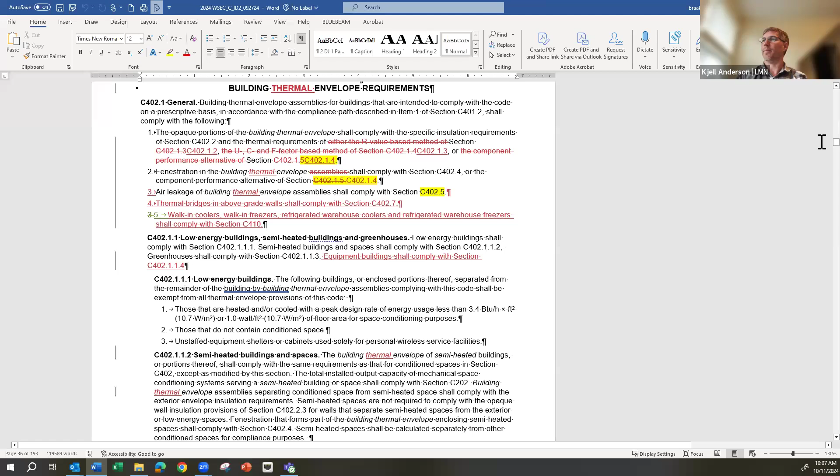We now have an agenda. We are on to item 3, continued review of the integrated draft 2024 Washington State Energy Code commercial. As mentioned in the intro, if we could skip to the TSPR C409 section, that would be great. Mike Rosenberg, are you on the call? Or Supriya? Supriya's here. Mike's on travel and won't be able to join. He asked me to join for this discussion.

So I'll start by giving folks an overview of C409, specifically how it differs from the current HVAC system performance approach in Washington State 2021, and also lay out reasons why Washington should probably continue with the 2021 approach for their next code edition.

So to begin, C409 is based on the 90.1 2022 approach for HVAC system performance. Hey Supriya, just to be clear for the whole tag, you are recommending, based on your review, that C409 be maintained in its entirety without the redlined changes, as opposed to going with the redline changes.

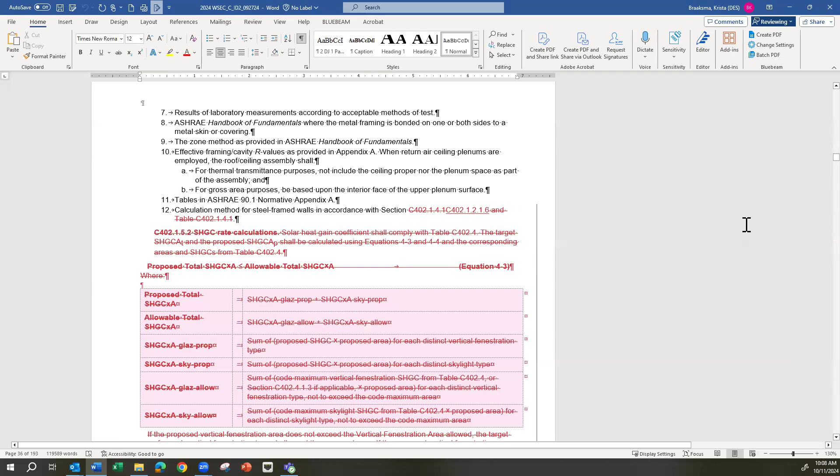Is that correct? So if I understand correctly, the redline changes for the new code edition bring it more in line with IECC 2024, right? That's correct, the redline is IECC 2024. So I am recommending not making the redline changes. There are some things which have been improved, and we can go through and talk about those, but yes, I am recommending not implementing the 2024 approach for the next Washington State Energy Code.

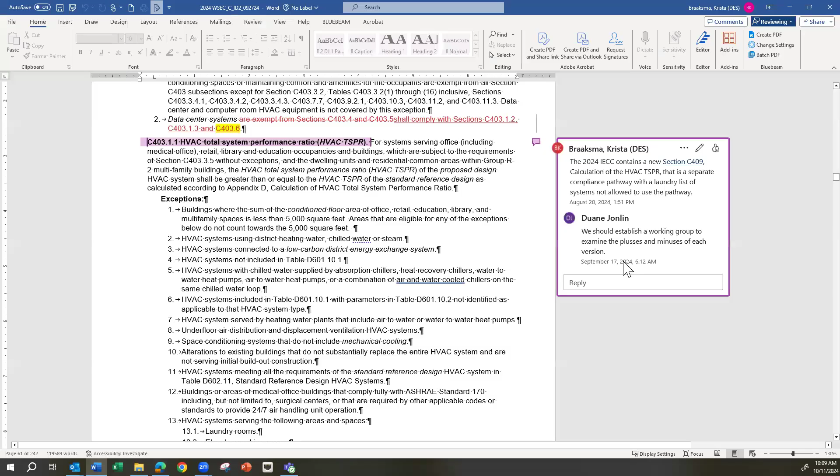Okay, do you want to go through the top few reasons why you're making that recommendation? I want to clarify before we get into this that our C409 is metering, not total building performance. Right now, I don't have in our integrated draft the IECC C409 in there. So Supriya, what you were suggesting was that we don't adopt the IECC 2024 C409, and it's not even in the integrated draft. One of the big reasons was it's not compatible with Washington codes, is what I heard. Correct, it's not compatible.

So the big thing is, the Washington Energy Code uses an approach where the proposed building is compared to a baseline, and the baseline is modeled with dedicated outdoor air systems and heat pumps. The system configuration was determined by the Washington State Energy Code tag with the objective of decoupling ventilation air from conditioned air and having heat pumps for space heating and cooling. The DOAS in some cases also have an ERV.

Now the 90.1 or IECC 2024 approach is extremely different. In Washington State Energy Code, the proposed building is directly compared to the baseline, and the proposed needs to be equal to the baseline or better to comply. So basically you're comparing the performance of the proposed system to a DOAS and heat pump configuration. But in the 90.1 and IECC approach, there's a baseline which is defined based on 90.1 2004 code requirements, so it's a stable baseline similar to Appendix G, and the target system is a good-choice HVAC system selection.

It's not representing heat pumps or decoupled ventilation systems in most cases. So for large office or medium office, it could be a VAV or packaged VAV with reheat, with electric resistance or a hot water boiler. Also, this process establishes an MPF, a mechanical performance factor, similar to the BPF concept in Appendix G. So the proposed building would be compared to a stable baseline with this MPF factor applied on top of it for a target performance threshold.

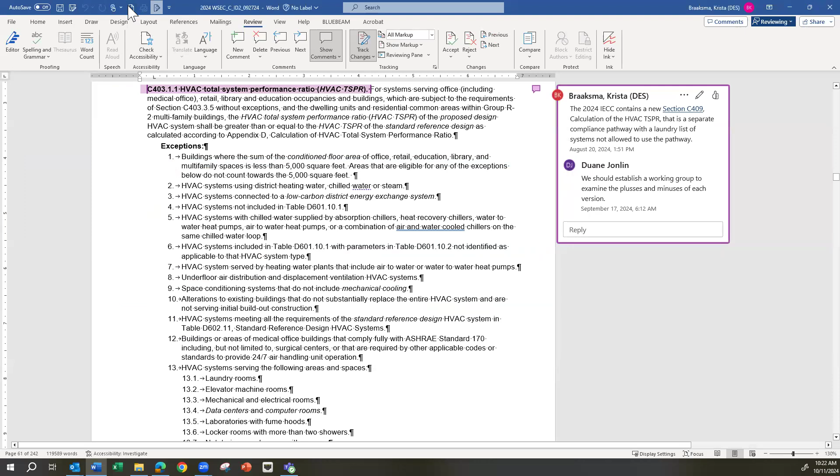So first off, we eliminated any language that would inadvertently cause it to require an engineer. We all unanimously agreed that not everything needs an engineer, and we also reviewed where it was used.

And then secondly, there was a listing of independent in the definition, and in some cases where it was used, independent could force an unreasonable expectation that a contractor had to hire another subcontractor to verify things, or an engineering firm would have to hire a sub-engineering firm to verify things, which was unnecessary in a lot of situations.

So we felt that adding some qualifiers like qualified person, competent, possessing technical expertise and experience, was enough to give the code official discretion to reject any bad sources, but without actually imposing onerous requirements.

Greg, are there comments or thoughts on the proposed revision for this definition?

I would say, just as a code official, that the definition we have now is not great, but the proposed definition is even more nebulous, and it would be hard for any code official to argue that somebody doesn't have enough experience. Basically, I think an approved source becomes just about anybody.

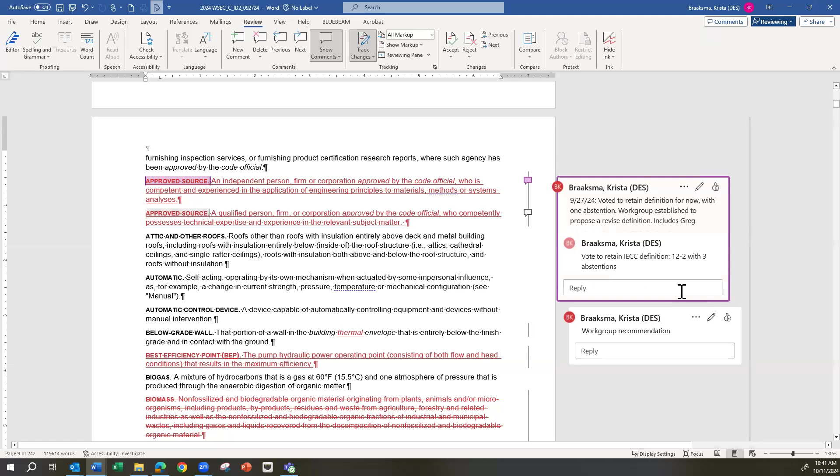Greg or anybody else, do you have a recommendation? No recommendation yet, that's a bigger issue. We've had some emails back and forth, but haven't met yet. We're waiting until after we do the service water heating and space heating sections, since those are directly impacted. Once we've gone through those red lines, we'll meet. Appreciate that, thanks for all your work. Ideally, if you could get your recommended language, or minority reports, to the group a few days ahead of our next meeting, that would be spectacular. I'm envisioning this probably being a code change proposal since it'd be pretty significant either way.

To be clear, the only thing we're considering now is whether there is language in the IECC 2024 that is better than the Washington State Energy Code 2021. So the recommendation could be to leave it as is, and there'll be multiple code change proposals about it, I'm sure. That's what I would expect. But if there are any great improvements we can make now based on the 2024 IECC, that would be fine as well.

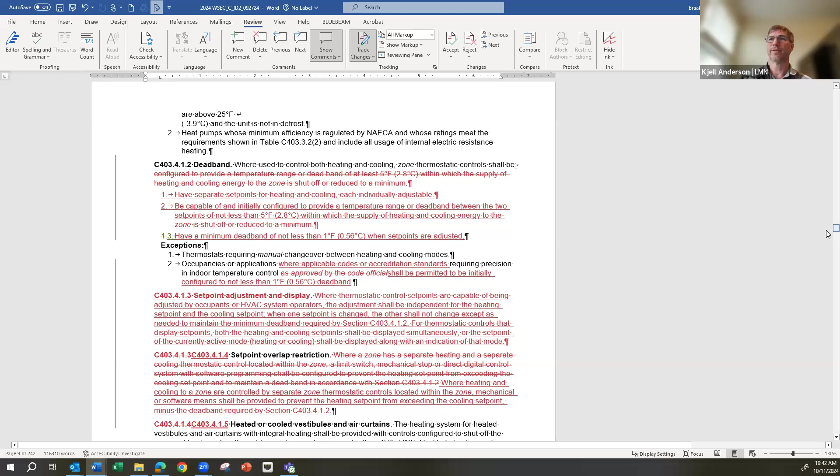Okay, those were our work groups. So let's go back to where we left off last time, which was around... do you remember where we were, Krista? I was in the beginning of C402 somewhere. We kind of skipped around a little bit.

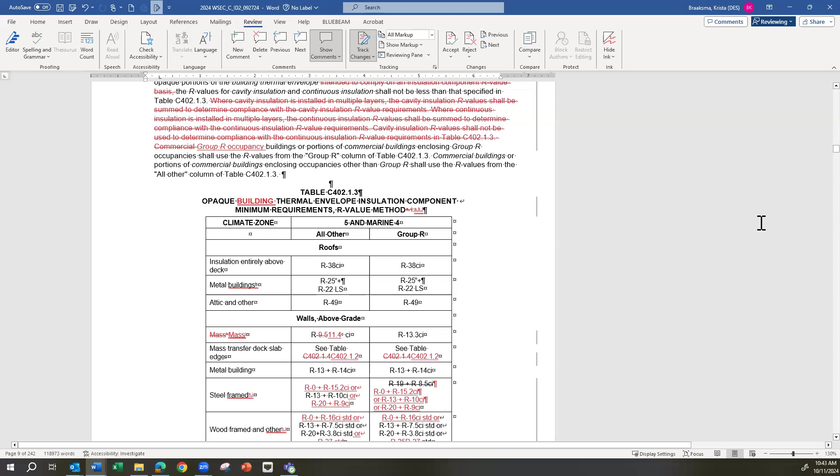So now we're going back to our normal, regularly scheduled program where we scroll through once we find the right place. We'll scroll through and use the redlined updated language unless someone wants to discuss specific provisions, so just raise your hand and we can discuss. Is this about where we were? Yeah, we discussed the U-value table or the R-value table, and there were some minor changes to that based on the discussion, so we might want to take another look as they've been modified. But that's about where we left off, I believe.

Okay, here we are. As Krista slowly scrolls through the code, raise your hand if you have any suggestions or recommendations for the tag to consider. To be clear again, the black is the 2021 Washington State Energy Code commercial, and the red is the 2024 IECC language. Our task is to make the code more stringent if the 2024 IECC is more stringent, or not adopt the language if it is not more stringent. Go ahead, Larry.

Can you give us time to get caught up to where we're at before we're moving through this stuff? I haven't even turned to the right page yet. Thank you, okay, we can pause for 20 seconds to get up to the right page.

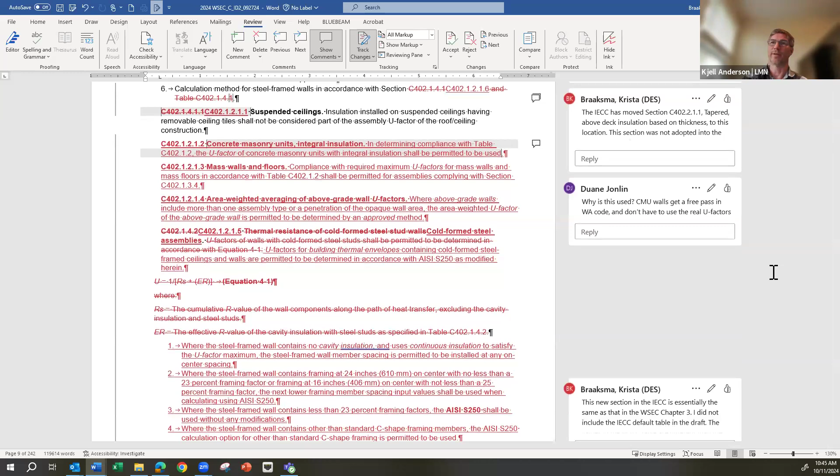Duane, looks like you had a comment on the CMU C402.1.2.1.2. Do you want to say anything for or against what's on the screen? Well, concrete masonry units, integral insulation. It talks about how you determine compliance with the table, but in our state code, those don't have to comply with the table. So there isn't any point, unless somebody can think of some reason that you have to determine the U factor of those CMU walls with integral insulation.

Okay, maybe now I'm thinking of a good reason to argue with myself, because the CMU with integral insulation exception applies to 15 specific building types, right? And so I guess this could be used for some other building type that wants to use that value. So tell you what, can you delete my comment there?

Okay. Uh-oh, skipped ahead. Okay, we'll find ourselves and then start scrolling again through this, Larry.

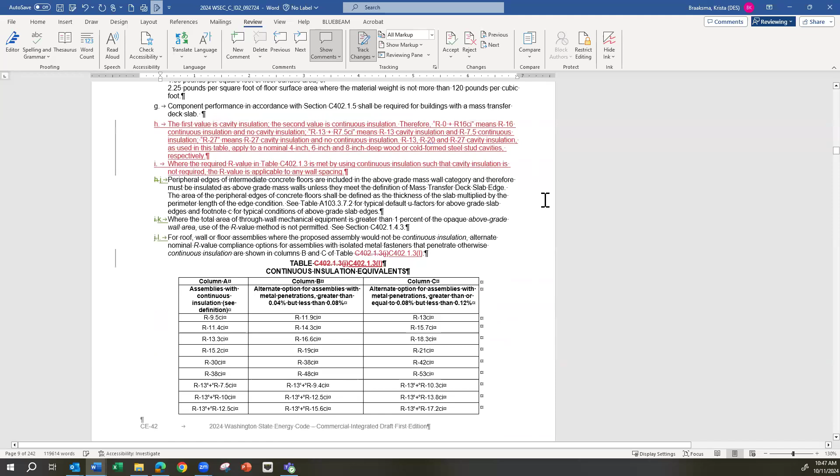Can we put a note in there about those 15 building types that this doesn't apply to? Okay, so there's some clarification there. I mean, Duane brought up a good point about those, and it would be nice to have a little footnote in there that says those 15 building types don't apply to that. Okay, like a C section. Right.

I personally don't support that change, because the first part of the sentence says determining compliance with the table, the U value table, and in that table it says that you don't have to comply. So I don't think another note here is needed.

That makes sense. The section Krista is in right now is the footnote. Yeah, was that table C402.1.3? C402.1.3. 1.2, wasn't it? Yeah, it's also in the 1.2 table. Right, I just happen to be right there. So this is the same one for the 1.2. Yeah, okay, that makes sense to me. It's already adequately referenced.

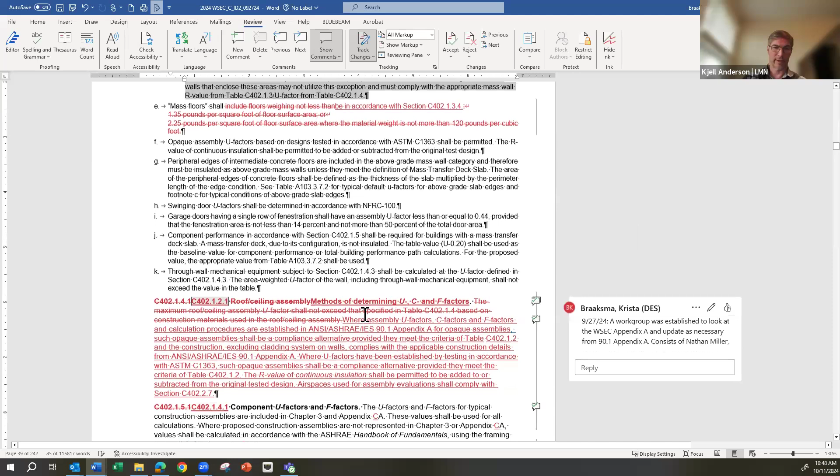Yeah, I think Larry's concern is covered. It will continue scrolling through.

And then here is where I added the additional values from the 2024 IECC table. They're basically alternate compliance factors for convenience.

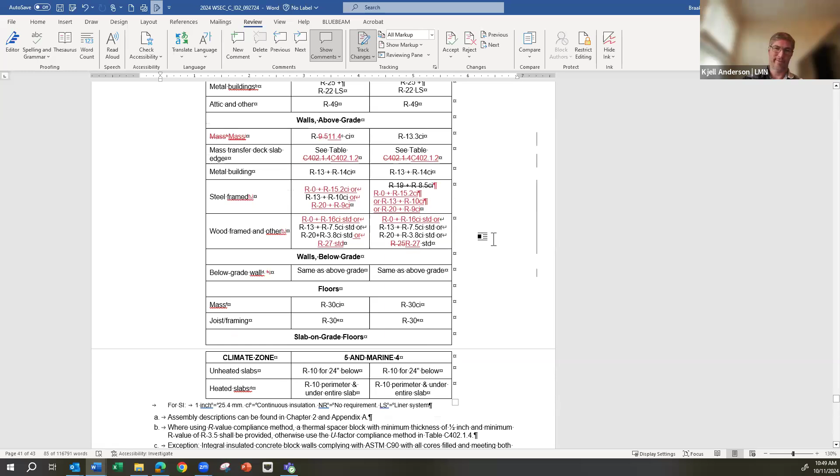Larry. If you back up in the table there, hold it right there, steel frame. So in our table, it showed R19 plus an R8.5, right? So are we talking about eliminating that? I can go with adding it, but I don't think we should eliminate something we already have in there. I mean, it's another option.

You see steel framed where? Yeah, I'm looking at that. You're scratching out something that's been a practice and you're inserting something new, but you're not allowing the practice that's been used. So why can't we add the additional writing and leave the scratch out there? I mean, not scratch it out, leave it there, just add the additional.

Because our rule that we're following here is that we're going with the more stringent of the two. Right? No, if it's the more stringent of the two, that would only leave you one to choose from. Now you have three additional to choose from. So it'd be much more restrictive to leave it the way it is.

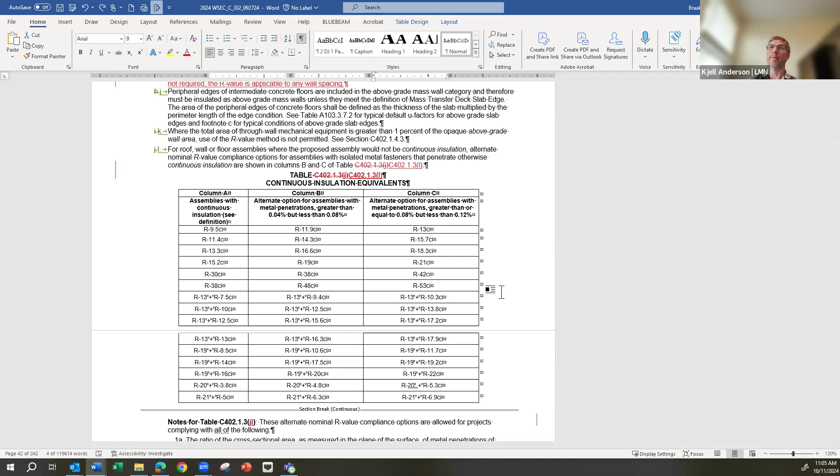Just to be clear with everybody, when someone says we will submit a code change proposal, the tag will not submit code change proposals. The tag is made of members, and members, and anyone in the public, are more than welcome to submit a code change proposal. But the tag will not officially convene to make code change proposals. We will only accept code change proposals and review those.

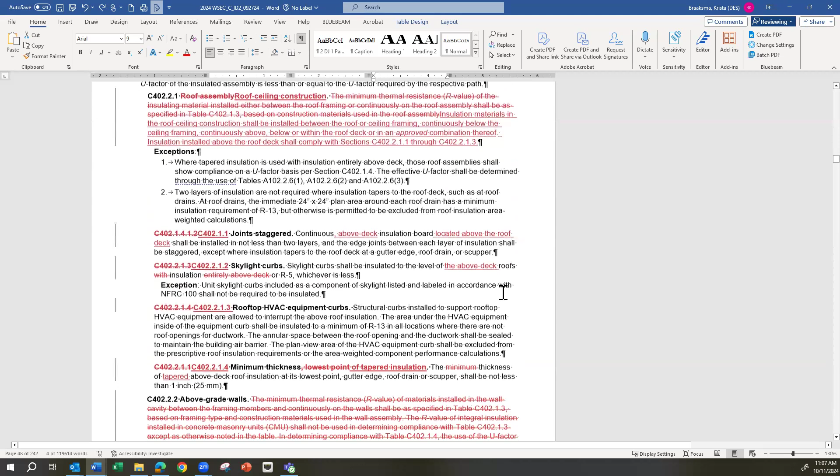I had a little note on C402.2.1.1. The sentence says continuous above-deck insulation board located above the roof deck. Seems redundant to me. It's a minor thing, but things like that bother me. I'd suggest striking it, making the sentence say continuous insulation board located above the roof deck. I'd support that, makes sense. Look, we just shortened the code by two words.

Makes sense, we don't really need a motion to do that. When we make the motion at the very end, it will include all the things we've discussed. Good catch, Kevin.

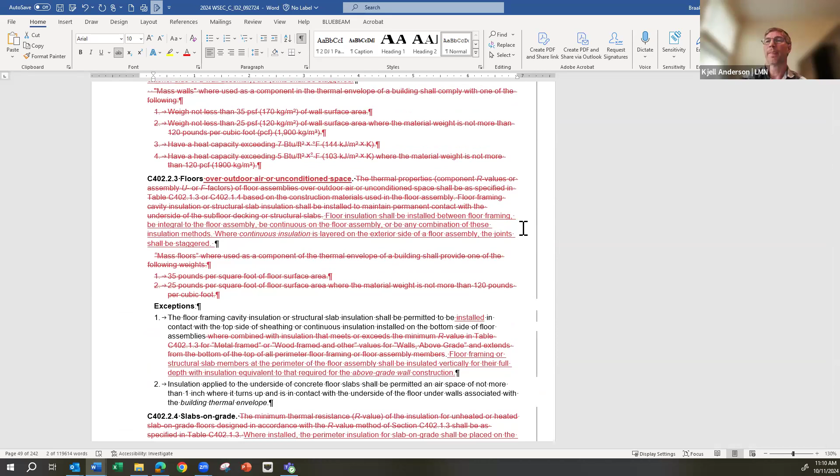Kjell, could we, I'm sorry, I think we passed by something back a page or two, 402.2.3. Sure, we can always go back, I want people to feel free to do that. The text is so tiny on my laptop, I'm having a hard time seeing where you are, but did we...

Did we take out that sentence about the cavity and continuous insulation? Okay no, that looks like that was fixed since I last saw this. Sorry, keep going. Thanks, Duane.

I have another one at the bottom of 402.2.7, I think. There's that last rate, 70 millimeters per second. I don't know, do we ever have just metric units in our code? Could maybe we just have a staff note there that will figure out what the airflow is in inches per second and insert that, or are we okay just leaving it as 70 millimeters per second?

Yeah, if ASTM-C 1363 is in millimeters, then that would make sense. Right, I think the C indicates that it's a Canadian standard, and they just can't help themselves. If it's okay, if it's part of the standard, I guess we can continue on. Well, go ahead, Larry. Canadians told me yesterday they want to change the Canadian minute to 100 seconds too. So maybe that, yeah.

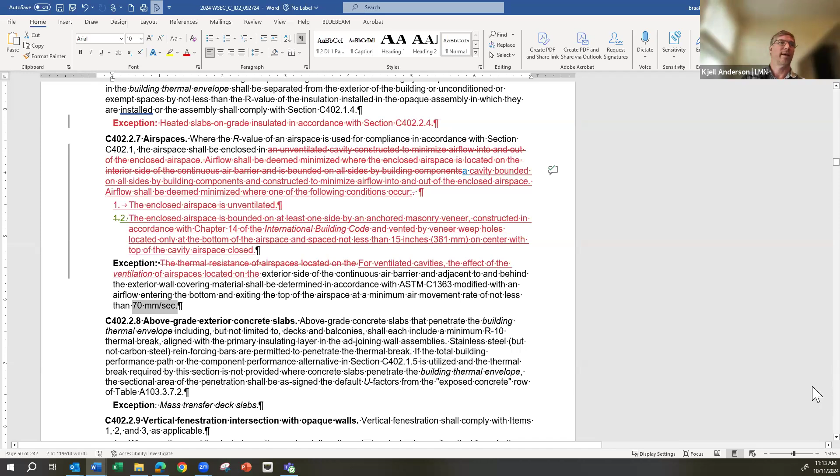Well, I think that it is a good idea to have it in inches per second. Yep, I mean, because the guys out in the field, they ain't using any metric that I know of to speak of. I finally had to bust down and buy a metric tape measure the other day, but we use it once in a blue moon. So, okay, can we have a staff note in here, it appears to be 2.7559 inches would be 70 millimeters. I don't know how many significant digits we want, but 2.8 would be one significant digit. Sounds good.

I have a question about the numbers in this table. Sure. Krista, could you call up the IECC values for solar heat gain coefficient? It'll take me just a second. I think we missed, I think some of the updates got missed. I thought I double checked it after the last meeting and they were the same, but I could have missed something. Yeah.

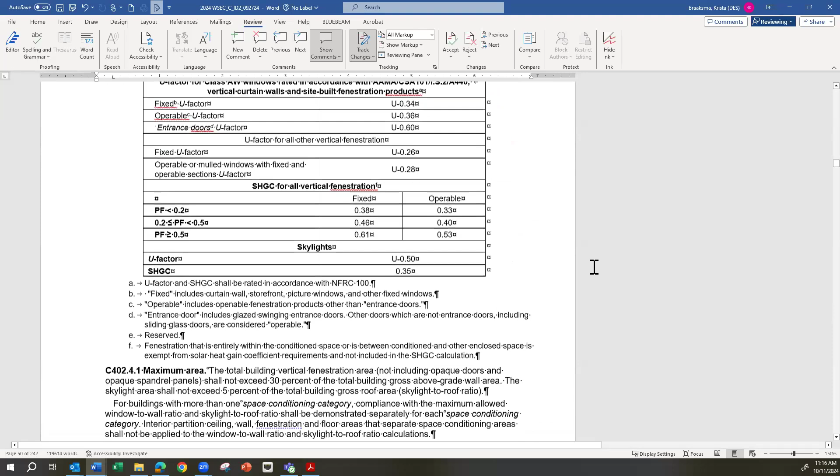Pam? Yeah, apologies, I stepped away for a moment, so I don't know if this was covered, but the section numbering in the 24 code did change, so fenestration is C402.5. Right, but that still doesn't work with the energy, the WSEC, because we skipped a couple of sections that aren't adopted. So we wouldn't reserve C402.4 and update numbering for fenestration to match the IECC?

No, that would require striking all of C402.4 and putting it all in C402.5, and so everything would be, it would be really hard to find where the changes are, just because of the vagaries of how we need to file it with the code revisor's office. Okay, let's keep going.

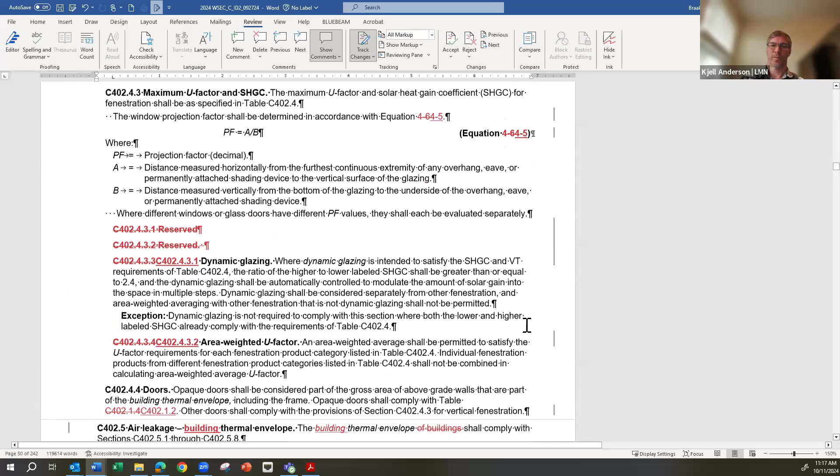Minor editorial on C402.5.1. I think 'air barriers' should be singular on the second sentence: 'The continuous air barrier is permitted to be.'

Yep, I agree. It's usually singular, even if it's... yeah, should be singular.

Oh, and then one other thing about the air barriers. The last sentence has 'air barrier' italicized. The previous ones don't. I think it is a defined term, but I don't know which is supposed to be which.

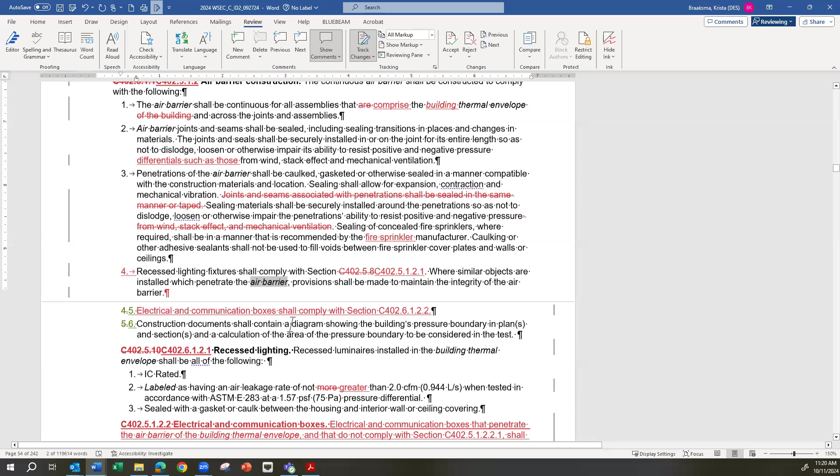Lisa: Yeah, I have a question about, maybe this is a code change proposal, I'm not sure, but I have a question about exception 1. Because the language in provision C402.5.2 clearly states the required air leakage rate is 0.25.

And then number 1 is an exception that says if it's greater than 0.25, then you have to do extra work until it is achieved. It seems kind of redundant. I mean, is that an exception to that language? It's not really getting somebody out of this requirement. It's just saying that if it doesn't pass the first time around, you've got to do more until it does pass. So I'm just not sure if that's an exception.

That's a really good catch. It's not an exception. If anything, it should be another sentence in the paragraph above and not an exception. Yeah, just take it out of the exception list and, as Wayne just said, put it up in the charging statement. Because historically, we used to say you could just go around and try to fix the leaks, and that was good enough, but that's not allowed anymore.

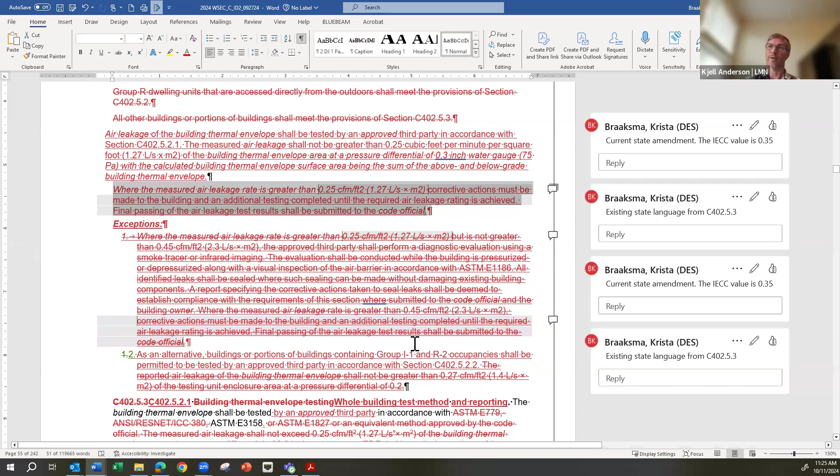I think that's a really good thing that will help people understand what's going on with the code, and code change proposals will be accepted the next few months.

It's got an airplane going overhead. Nathan, you have your hand up. Okay, hand down.

Do you have a question on this one? I didn't have time to go back and compare the IECC language, and I guess in the interest of time, I would just say I can do that later, but as a code change proposal.

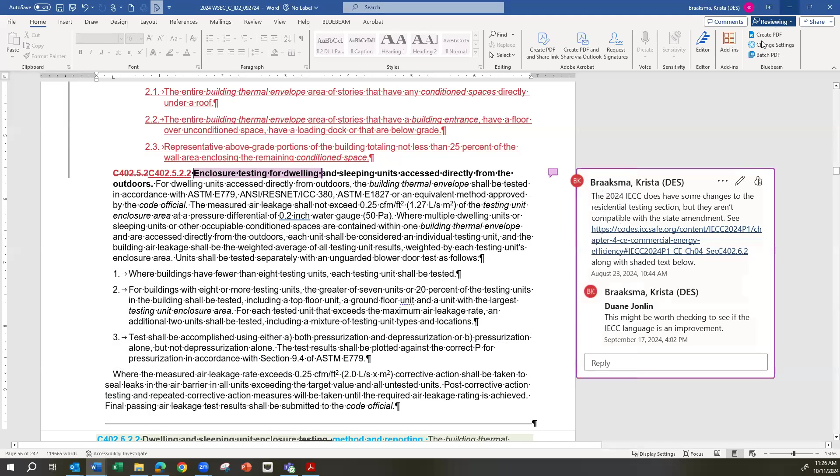But for now, we just leave our state language in as Krista has done, and not change that. Okay, that sounds very reasonable. Krista's awesome at doing this kind of thing, so doing what she suggests is almost always a good idea. Okay, we'll move on.

Oh, I already had it there. So that area right there in green, that was the IECC language? Correct.

Kevin. So is the notion here to leave both or strike the IECC stuff from that one? Yeah, strike it now. Not include the IECC stuff would be the default. I guess that's true.

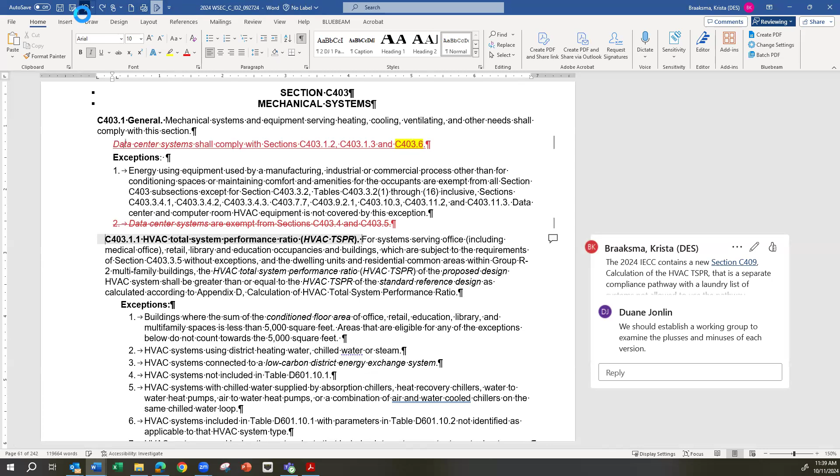So I think there was actually some logic in that being an exception. However, it could just say data center systems shall only comply. Only need to comply. Was that the intent of the IECC language, do we think? I don't know, because they have to have the same kind of fan system efficiency, and there's a number of other kinds of things that are required.

Okay, yeah, the C403.6 is the fan energy requirements. If nobody has a great idea of what to do here, we can leave it with a red line as is shown on the screen and accept code change proposals if somebody thinks of better language. I don't want to spend a lot of time dickering with good language.

Sounds good. Lisa? Yeah, I was actually going to agree with Kevin's point that actually right now where it's located, it does pretty much give data centers—it says it only has to comply with these three provisions. So that's been our interpretation. So if we moved it up into the body or under the charging statement, then yeah, you would technically have to assume that the entire mechanical section applies to it. And it doesn't accomplish anything by moving it up into the charging statement, where right now it's truly an exception to all other requirements except these three. That's the way we've read it.

But it could be clearer if that's the intent, it shall only need to comply. It would be clearer if that's the intent, at least to me.

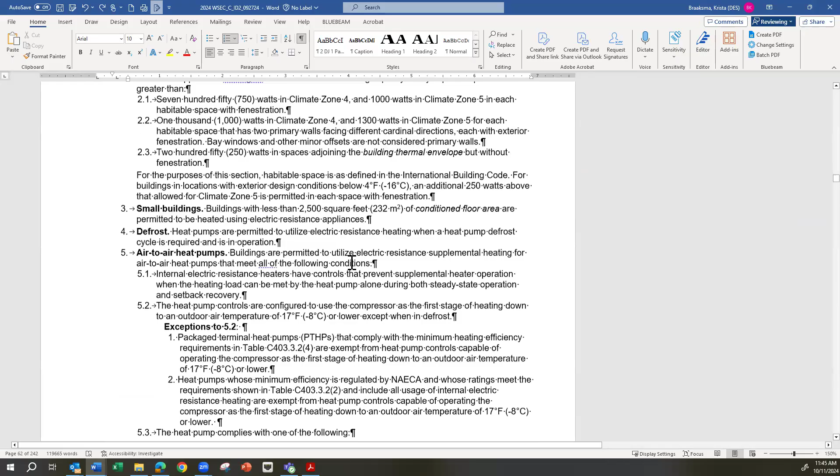Right now, could I suggest, unless somebody has an objection, that we skip past the next 20 pages or so of mechanical system tables instead of scrolling through them slowly? Well, if there's no changes, we can easily just skip ahead. Well, there are changes and updates, but is anybody intending to get into the details of specific numbers that have changed since the last edition of the code in the tables?

Well, I think scrolling through can be done in a minute or two. Okay, so I'll bring up Lisa. Do you have something? Yeah, actually, I have a detail I wanted to point out in one of the tables. Okay, never mind, just one. Never underestimate the technical nature of this group. All right, so Lisa, what did you want to talk about?

The warm air furnace table, which was actually handled by the MVPE committee just recently. Which number was that, Lisa? Oh, let me see, 40332, parentheses 5. Thank you.

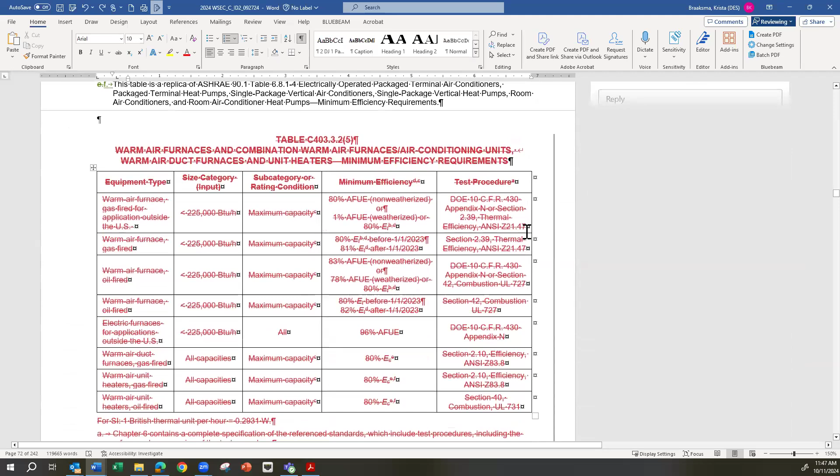Yes, so stop there. So yeah, we adopted the new table, which is great, that's what the official opinion lined up with. However, in the first row where it says 'see informative appendix F, table F-4', that is an ASHRAE appendix. So if you go look at the footnote that goes with that, which one is it? F. That one. It should say 'see ASHRAE 90.1 informative appendix F'.

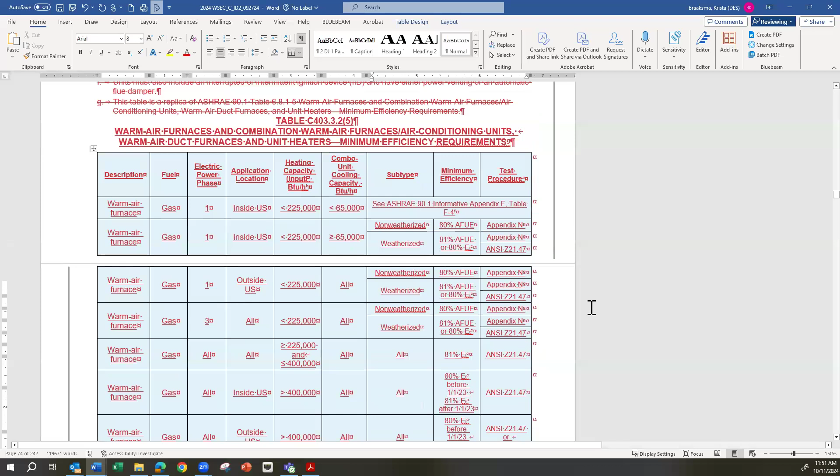So is the edit to remove that column inside/outside the US, and just say the rows that are outside the US are going to be removed? Are those editorial then, Krista? So we don't have to tackle them as a tab? Yeah, that's not something I want to try to do here. Fair enough, okay, great, thank you.

Just a side note, you can look up ASHRAE 90.1 read-only for free, so this isn't a case where you've got to go buy another book.

I'm pretty sure the footnote for N points to ASHRAE. Let me scroll down, look at that. Whatever footnote that is. That was F, right? Oh, I see, Appendix N is actually right there, 96. Well, what are we talking about here? Are these inside the building? These are electric too, electric warm air furnaces. Oh okay, yeah, we're not in the boiler table yet. And yeah, Appendix N equals test standard 10 CFR 430 Appendix N, so that's clear.

Yeah, great. Should it be on all of those specifications then, test standard? I don't know, what is the committee's thinking? What's the question? Should all of these specify test standard in front of this section? No, I think those are fine. Yeah, Appendix N equals test standard, but that's fine, the rest of them list test standards, so they're already there. Okay.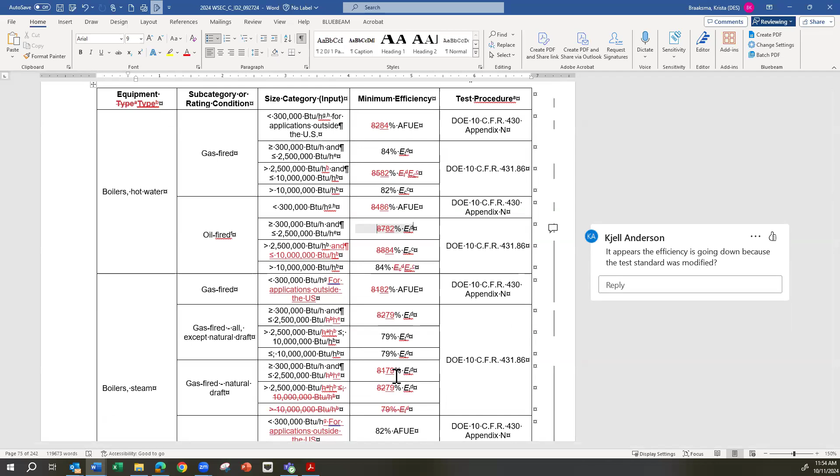Besides, I don't think we're empowered to change any of these numbers, they're federal, so just leave them all alone. I don't know anybody running that kind of efficiency in an oil boiler because of the problems it has, especially so.

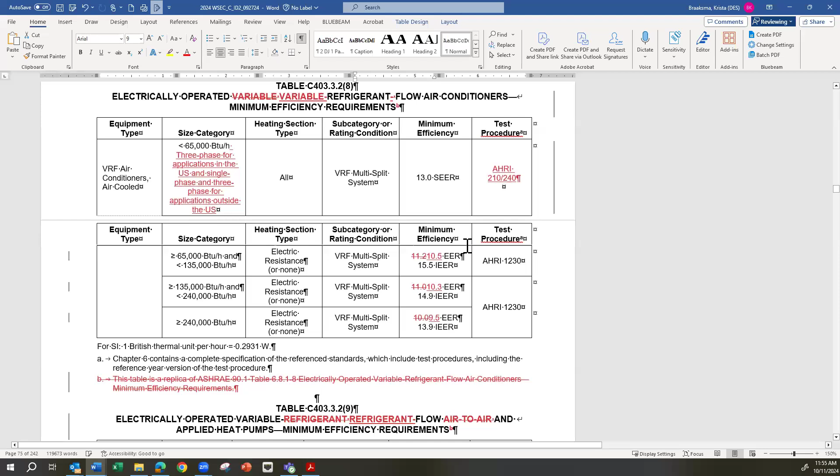And then I'm assuming you want to. Good catch.

Yeah, I was gonna say in these tables too, this is also reflected in the official opinion. So it's good that we're lined up with what was just decided by the MVPE committee.

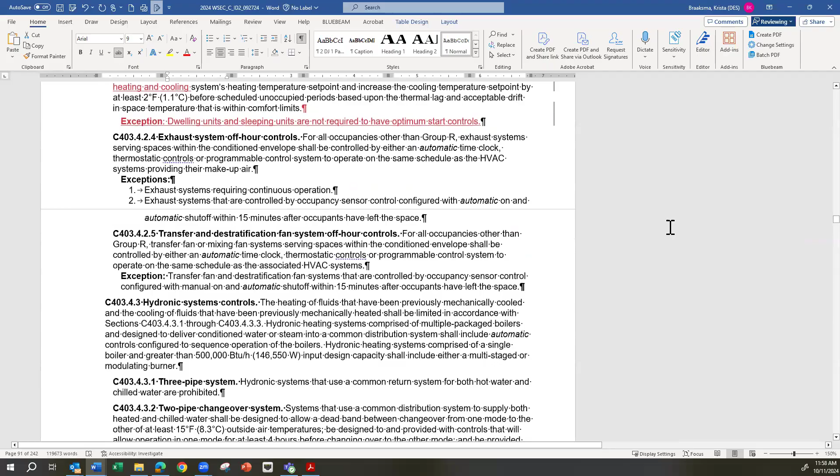So you had a note here, Krista, on a new section. Yes, let me skip forward to that one. You're skipping ahead to that? Yeah.

Can you suggest we have a working group on this? Will everybody read it a little bit?

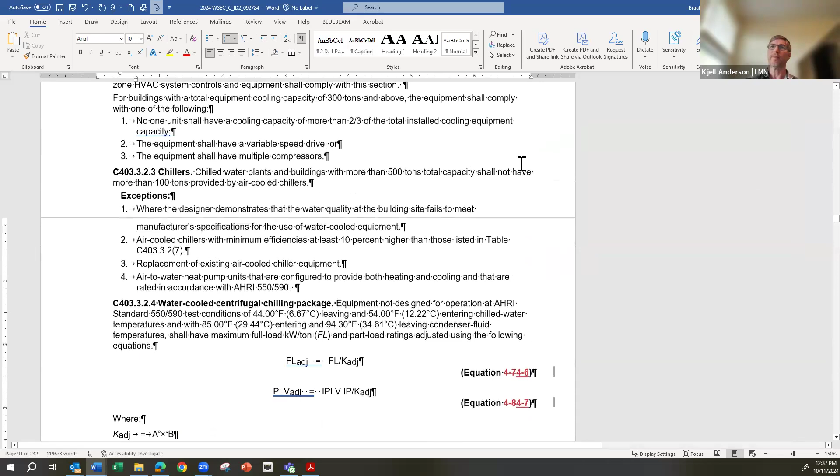Okay, we'll go back up to where the humidification discussion started. Thank you, everybody, I think that was a great way to resolve it. Greg, your hand is still up. Sorry. No worries.

Elizabeth, yeah, I just have a question. That was a lot of people on that email chain. I just want everyone to be aware that you're not creating a quorum with that chain of emails. Thank you.

Yep, so a majority of the TAG cannot email each other. I think there were like 5 or 6 people. Yeah, so I have Duane, Sid, Greg, Larry, and Lisa, and then you're going to be CC'd, Kjell. That would not be a quorum because that's not a majority of the TAG members. And sorry, Krista, you'd be also CC'd because I always CC you, Krista, on any of these correspondences. Thank you. Yep.

Lisa. Just a quick question, what does 'newly installed' mean? Anybody know? Does that mean a boiler installed in a new building, or?

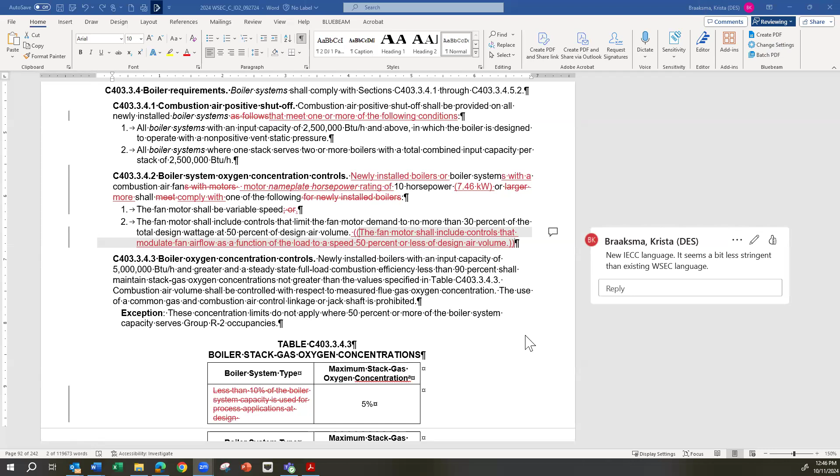Let's keep going. I'll go ahead and take that language on and see if we can come up with slightly better wording so it's a little clearer, but it's existing. So yeah, I'll do a code change proposal on it. Sounds great, Larry has some feedback, I'll be happy to hear it when we do that. Sounds great, Lisa. Okay, let's keep going.

Got an hour and 15 minutes left, let's see what we can get to. I guess while we're here, one of the only other work groups I wanted to talk about today was for lighting power density, the LPD and LPA tables. We might need a group. Since we only have one more meeting left after today, I want to make sure any work group that is needed forms today, so that when we come back in two weeks, we can finalize the integrated draft.

So the LPA tables, I'll bring that up in a little bit, but think about whether you would want to look at that as part of a work group. And we'll keep going, keep scrolling right now.

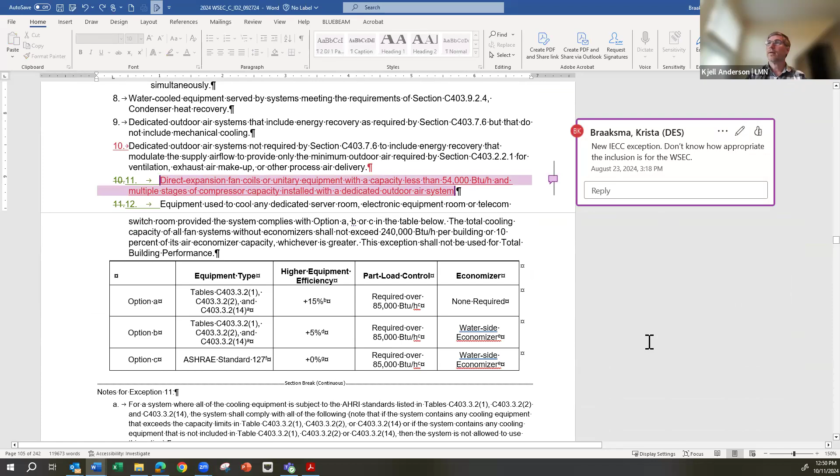Okay, see what's on the screen. Is there any comments on this? This is an exception for economizers.

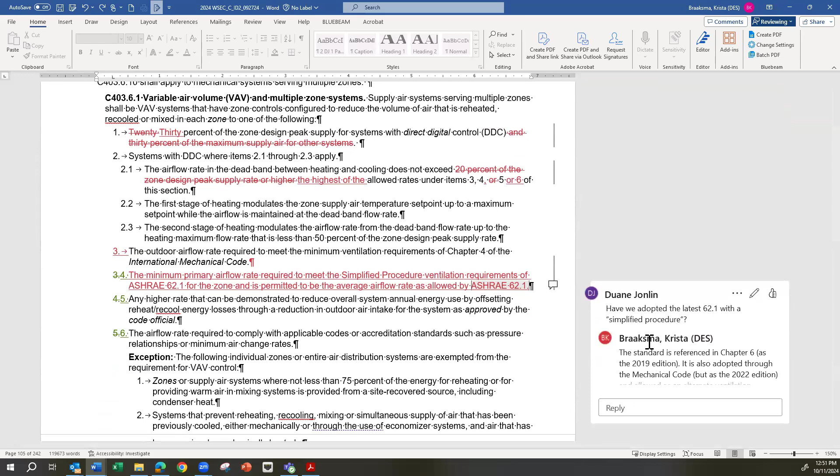And this is an issue where the IECC has different standards adopted for the mechanical code versus the energy code. And I would think we'd want to be consistent in that adoption. So I would tend to say that we would go ahead and upgrade this to the 2022 edition of ASHRAE rather than keeping it at the 2019.

It's Krista, Lisa. Sorry, I just caught back up with that exception that Krista brought up for economizer. Sorry, I just want to read it really quick. So it's talking about DX fan coils or unitary equipment capacity less than 54,000 BTUs installed with the DOAS. It also says multiple stages of compressor capacity.

I'm curious, how does that differ from exceptions 1, 1A, 1B? And perhaps nobody's really looked at this yet to sort out if we're creating a wrinkle or not. Well, 1A, 1B is for specific occupancies. Yes.

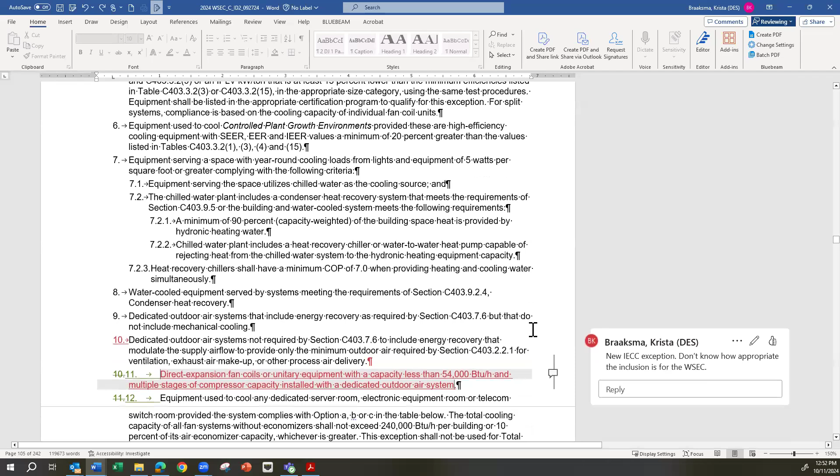Right, and this new exception appears to not have those same limitations. Well, 1A is for everything except R2, and 1B is R2, right? So it includes everything, but it doesn't have a 54,000 BTUH limit. It doesn't, so I'm just wondering, let me think about this for a second.

Maybe doing it on the fly is not the right way to do it. We have other mechanical engineers on the call. Can anybody else weigh in? Yeah, that's why I threw that comment in there. I wasn't sure what to do with it.

Larry: Looks like this is the old rule coming back. No, it's not the old rule coming back. It's because you already have a dedicated outdoor system. So if you already have a dedicated outdoor system, hopefully you've got HRV or something on it. Why would you want an economizer? I mean, I think that's reasonable myself. I've got an HRV system that's a dedicated outdoor system, and so why would I spend any more money when it's already done for me?

Probably better. Okay, other than unless we're trying to get cooling at night when it's cool out. Now that makes sense. But for the outdoor air part, it wouldn't make sense. So maybe what you need to say is, I guess I just talked myself out of it, because if you want to get the cooling part of it, then you'd want it.

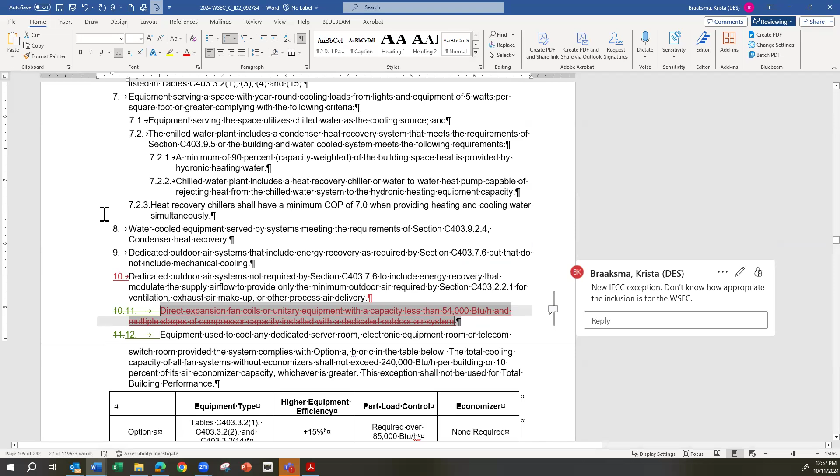Wait, if it's an indoor unit that is not in a space that's adjacent to the outside, correct? It's only exempting some system that's deeply buried in the building that doesn't have a way to connect to the outdoor air. Correct. Well, keep reading though, because the last part says 'and serving only spaces with year-round cooling loads from lights and equipment of less than 5 watts per square foot,' which is also in 1B. So that's very specific, like a little equipment room, or a tiny server room.

This other exception, new exception 11, covers everything, right? That's right. I think, unless I'm misunderstanding, it feels like this exception is more lenient than what's in the current code. Yep, which is why I'm thinking we should strike it. We have that motion on the table, does anybody have any more comments before we vote?

The motion is to not include what is now exception 11 from the IECC. All in favor, say aye. Aye, aye, aye, aye. Any opposed, say nay. Okay, motion passes. We have stricken what was exception 11.

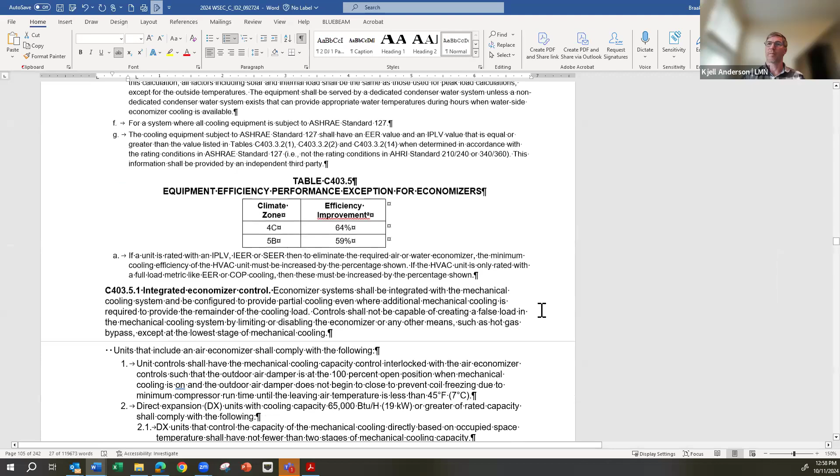Can you hear my cat purring? I see my screen was green around the edge, and I was wondering if you heard my cat purring.

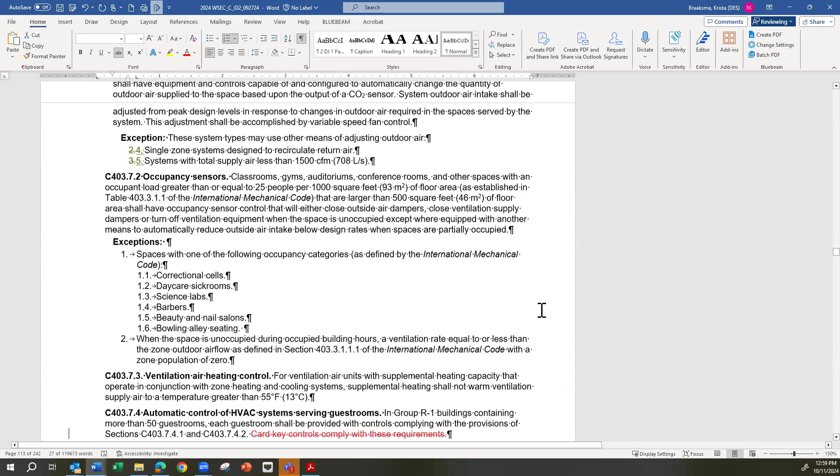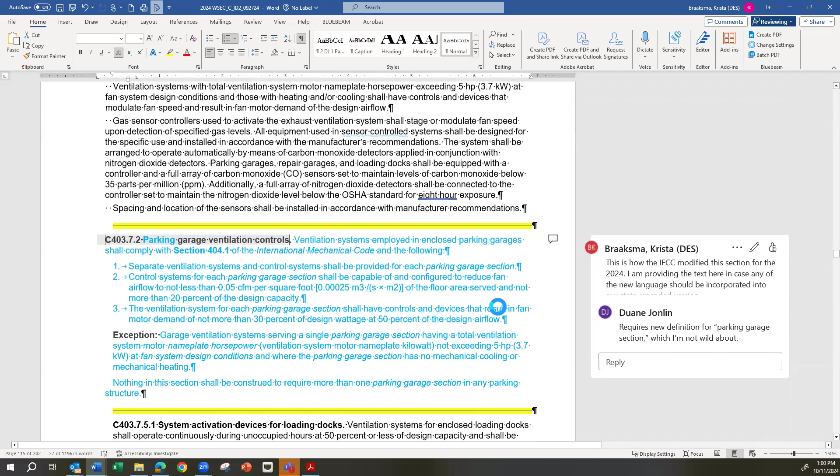Okay, this is another one where there was enough of a difference between the two that I wasn't quite sure how to integrate them. So I've got the existing WSEC language with the ICC language here. My personal feeling is that our language is better than what ICC came up with. They use this term parking garage section, which isn't defined anywhere and is kind of hard to nail down.

I would also say I think it's a given that the International Mechanical Code applies to everything. We don't need to point it out specifically, as applicable of course. Anybody feel differently, or do people need more time?

So are we gonna remove this section then and keep with what we got, unless somebody wants the updated IECC language, that would be the default, Larry? Yeah, I like that. My part is the 35 parts per million that's already there existing. I mean, you don't want to be there very long.

Okay, well the one detail in the IECC language is this requirement to have separate ventilation systems for each parking garage section. Does that mean not every floor, or does that mean something else? Yeah, it's a defined term, so we'd have to look at the definition to find out what that is, but that would be an added stringency, I think.

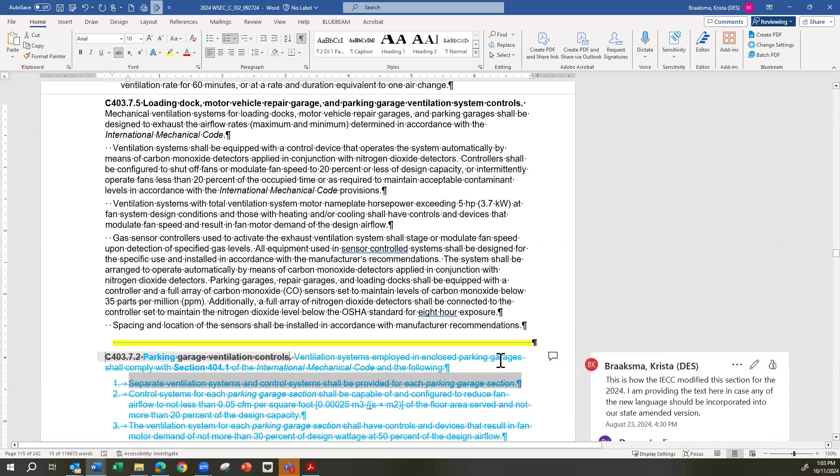I think having separate systems, or a way to control it, would be a good thing if you had separate areas like that. So, well, it is more cost. It is more cost, but if we inserted it, wouldn't it go under just the first paragraph? Sorry, I'd interrupt you, Shel. No, I was interrupting, I think you're right. It would go up there, and then we'd have to add that parking garage section definition.

Is that already in the integrated draft? The definition? Yes, yes, okay. And then strike the rest of the language in blue. Okay, that sounds good. Does anybody think that's not a good idea?

Well, the only other thing in there is the exception, which does say a garage ventilation system serving a single parking garage section, having a total ventilation system not exceeding 5 horsepower. So do we want to also adopt that exception so it's not implied that detail applies to really small garages? Hey, it's really bad to get poisoned inside a small garage, just like in a big garage. Fair enough.

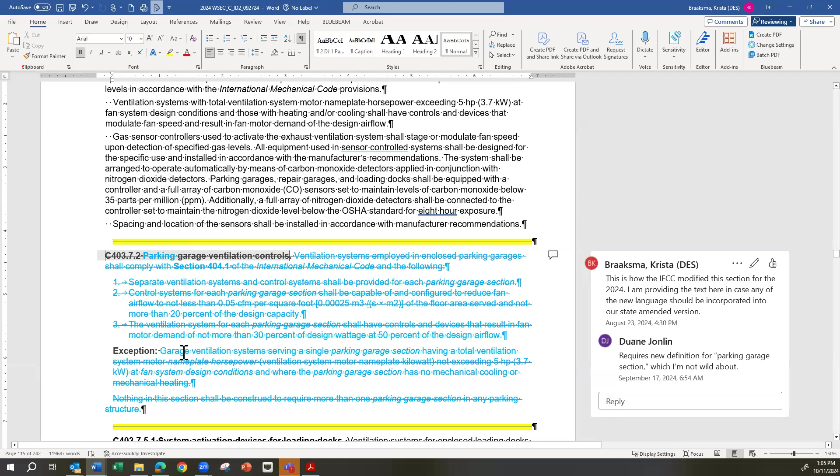Right, yeah, so well then there you go. That's a decision we can make here. I'm just pointing out that detail. I do see some garages that have individual parking garage doors within them, public parking and then individual garage doors for them, but I guess good design would suggest that door is kept closed.

Well, the exception, I think, is to have these controls that turn the system down. So if you have a small motor, you just run it full tilt and don't monkey with it, because you're complying with that first part, the 1, 2, 3, you're complying with all of that.

And it's a little, I'm having trouble differentiating now what we're keeping, what we're tossing. I thought we were keeping the part where- yeah, go ahead. Okay, yeah, we're just keeping this item 1. Okay, and the exception. I think we're discussing whether we should keep the exception, but oh, you're bringing up a good point.

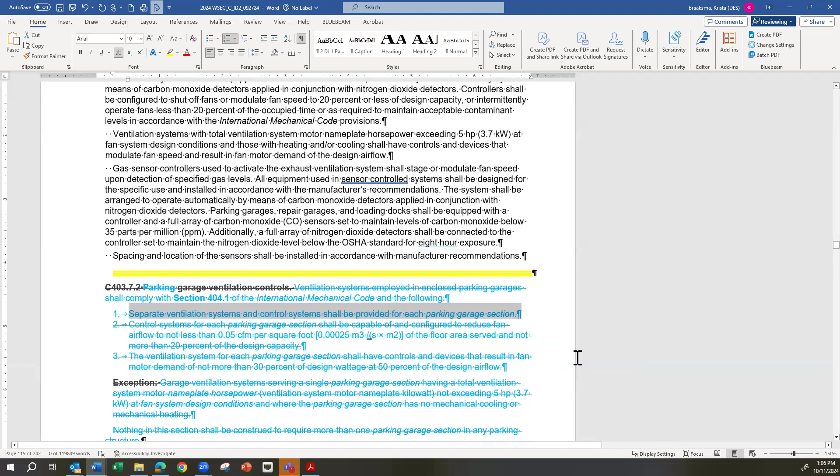You know, the exception is actually already in our base language up there, ventilation systems, blah blah blah, 5 horsepower. Yeah, it's like the same text, actually. Oh, good point. So I guess we're just pulling that one sentence in. Yeah, okay, and that covers it all, I think.

So what about this, what Duane said, and somebody made a check mark too? Sorry, that was me. Highly intentional. By which I mean unintentional. Not intentional. Okay.

This part on the last part here, on the hood part, says each hood shall be a factory-built commercial exhaust hood listed by a national agency. A lot of exhausts are built out of, I think, 16 gauge material welded up off the listed hood and then wrapped with 3M wrap going out. The majority of hoods put in over here in Spokane are probably built by the installer, not the hoods, but the chimney. The chimney would be built by the installer and then put in, and then you have a 3M wrap or something going up.

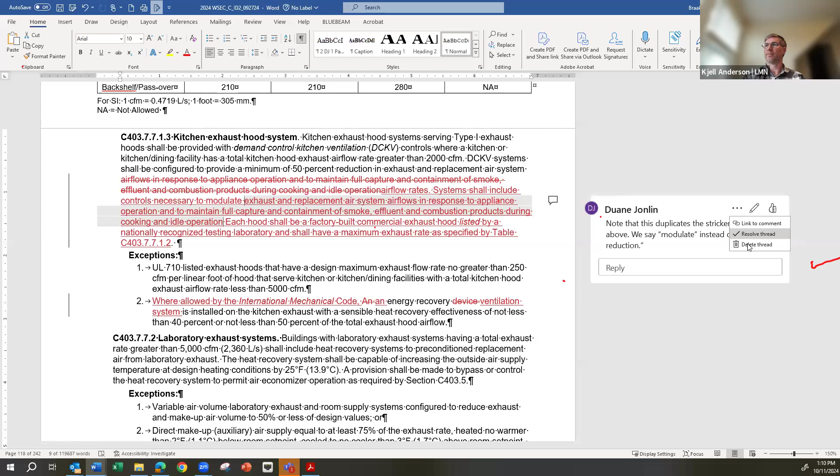My note there was just pointing out that we struck a sentence or phrase that we pretty much retyped two lines further down. As long as everybody's happy with how it comes out, I'm fine with it. Yeah, seems all right, it's nice to break up the sentence a little bit. Put a post-lunch comma going on.

One question: is that only for the type 1 hoods that have to be factory built, or what about type 2 hoods? Did we distinguish between that? Yeah, it just says kitchen hoods. Okay, type 1, so we're just talking about type 1.

For C403.7.10, there's also other language in our code. I'd have to dig, we might need to make sure that they don't conflict, with the Group R2 ventilation requirements. Sorry, I'd have to dig into that one. Maybe I'll take a look at that, and if I have further comment, I'll bring it up later. Thank you, Lisa.

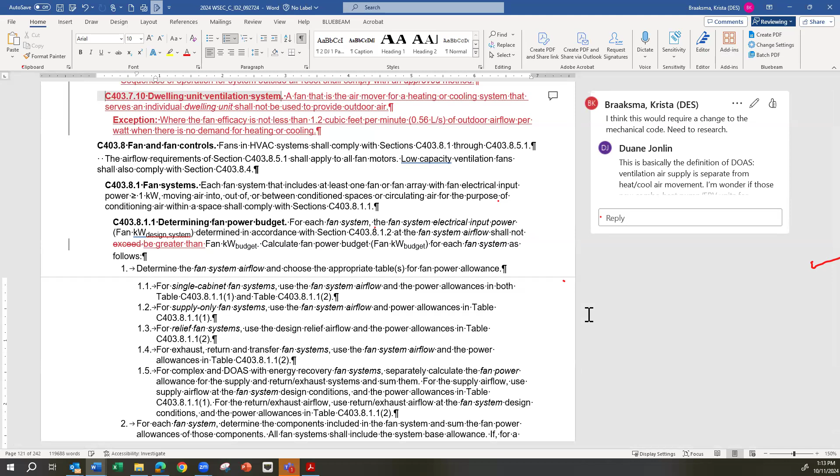Good catch, Lisa. Okay, so the section where I think we might have an issue is that new section from the IECC. Let me have too many things on my computer screen at one time. So it's saying a fan that is the air mover for a heating or cooling system that serves individual dwelling units shall not be used to provide outdoor air.

And then it has an exception where the fan efficacy is not less than 1.2 cubic feet per minute. We also, though, have a very specific section called ventilation for Group R2 occupancy, which requires a balanced ventilation system and all that. So this probably is going to take, other than me just looking at this for a couple minutes, to make sure that new section C403.7.10 doesn't muddy the waters for the balanced ventilation language.

So is this any improvement on the language that we have already, or is our existing Washington State language already better than this? I think, again I'm skimming this quick, I think that our language is more comprehensive. Yeah, I'm thinking that we don't want to adopt this because Washington State already has its own language that deals with dwelling unit ventilation.

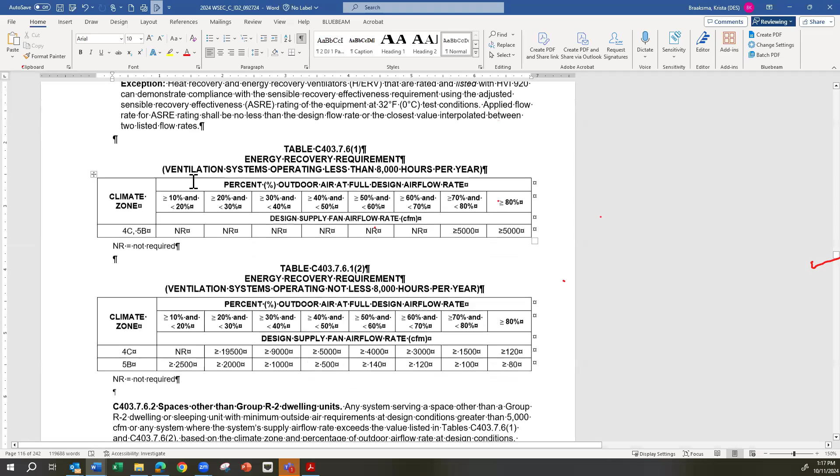Unless you wanted to have a pointer or something like that. I don't know what that accomplishes. It hasn't been a problem where it is now. Yeah.

I guess there's a motion on the table and it's been seconded. Yep, and I guess I was just checking.

So up in the prior section, it says R2, and here it refers to dwelling unit. There's not much of a difference between dwelling unit and R2. That was the difference that I saw. Yeah, and C403.7.6.1 says for all group R2 dwelling and sleeping units.

We're also going to be adopting back group R4, so I don't know if that should be addressed within the previous section. But that's sleeping, not unit typically, right? Yeah, group R4. Everything in group R is dwelling or sleeping except for common spaces, right? Yeah. So it would seem like we've got it covered above.

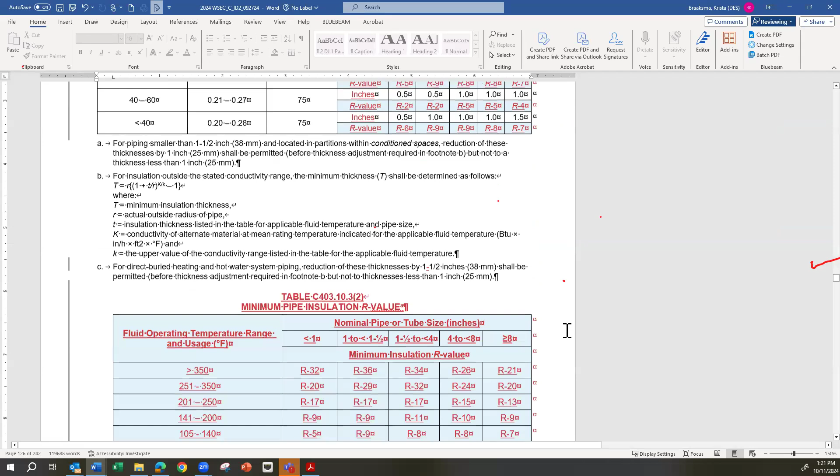Yeah, these were the values from the IECC. I think I double checked them, and in looking at your comments, they were... if you look at a row halfway down that starts with R20 on the left for very skinny pipe, and it ends with R20 on the right for really huge pipe, and in the middle the R value is higher. Is there any logic there, or is there just something wrong?

I echo your comment, Duane, because take that first line, the inches go from 4.5 to 5 and then stay at 5, but the R values wander all over the place. So I didn't have time to figure out what is correct in there. I could check maybe ASHRAE 90.1 has the correct values. It might be that IECC just got them in there wrong.

Although I think we should stick with what we have. We finally got what the insulation industry standards are, and we got rid of this R factor because the R factor is all based off 70 degrees. And we don't have in a pipe, we don't have 70 degrees, very rarely. And so that's why you run off the K factor and what's going through the pipe and the size of the pipe and how many BTUs you're actually losing per foot of pipe.

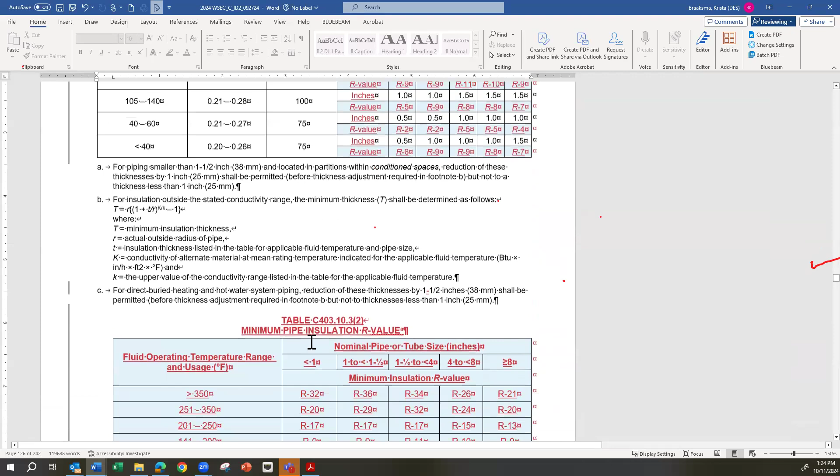So you like the C403.10.3(2) that's on the screen right now? The original thing that you had in the 2021 code was correct, and what people in the industry actually use.

If you want to look at what the BTU loss per foot is, you'd have to go to industries like Owens Corning and other pipe insulation manufacturers. They have a table that shows the thickness of insulation and gives you the BTU per square foot loss. I've always thought we should just have a table that says, for this outside temperature situation, you look it up and it tells you how much pipe insulation to put on. The table we have presently basically gives you that.

But going back to an R factor, that's nothing the mechanical industry uses. It's not even stated on the pipe or the insulation.

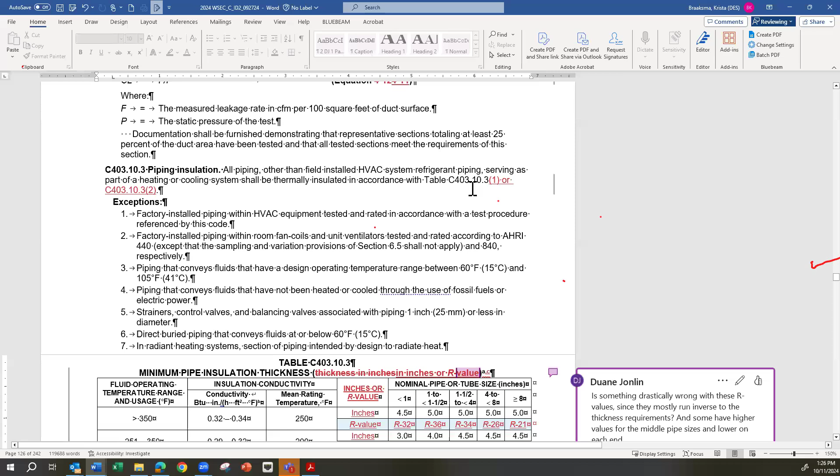Krista, was your intention that we had both of these tables in, or that we were going to choose between them? The IECC has both of them in here. Are they optional, or do you choose one or the other? I don't see the purpose of the second one, it's basically a repeat of the first. Yeah, it's in accordance with one or the other, it gives you the choice.

So there would be no need to put the R values in that first table if you're going to do both tables. We'd have to figure out if for some weird reason these are correct R values in that second table or not.

With that other note on the screen, it looked like that formula had an extra factor in it that wasn't supposed to be there.

The thing that gets me when you look at this table, Duane, is the 201 to 250 column, where you've got 8-inch pipe. An 8-inch pipe is going to transfer 10 times the BTUs as a 4-inch pipe, but yet you're using less thickness of insulation on it. I can tell you there's going to be more BTU loss per square foot with the 8-inch pipe, more BTU gain per linear foot than there is on 4-inch pipe. Do you see what I mean? If anything, that table should be higher at the 8-inch pipe.

What I don't get, and I need somebody who's more expert on this, is how that formula works. This is obviously not the same kind of R value that we talk about for wall insulation. No, that's what they're giving us, that's what they try to have us do, is use R factor for pipe insulation, and it's not done that way.

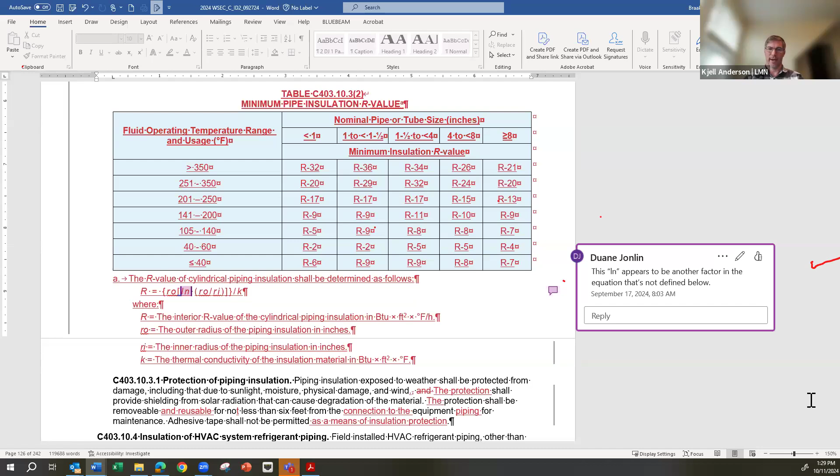I think that's how I understand the motion. Right, and I'm making that motion because it appears there are serious flaws in here that we don't have time to fix on the fly here today. Okay, we have a motion on the table, I'll second that motion, Greg is seconding it. We have a motion, we have a second, and the motion is for table C403.10.3 and table C403.10.3(2), we would not include any information updates from the IECC 2024.

And I'd also have to go up and delete this. Yep, that would not be necessary either. Okay, so that's the motion on the table, motion on the floor. Tables and floors. And once Krista gets done updating it, then I'll take a vote on the motion.

Okay, I think we understand. All in favor of the motion, say aye. Aye, aye, aye, aye. Any opposed, say nay. Okay, motion passes.

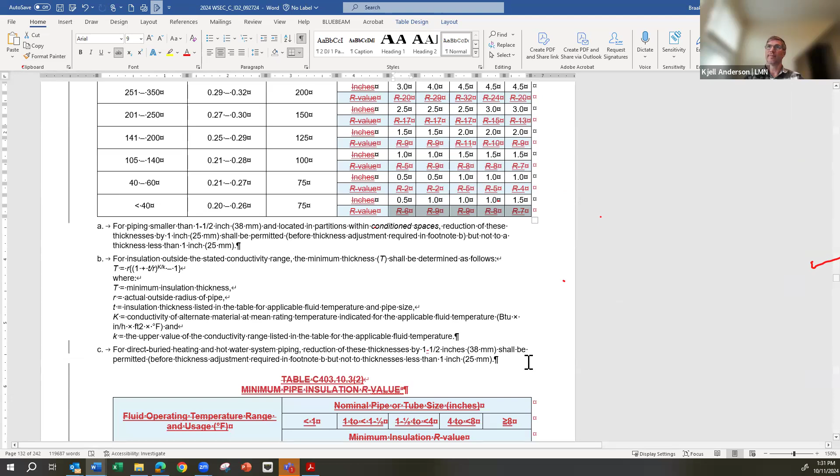Greg: I was just going to say I agree with Duane Johnland's comment about the time sensor, because really it's coldest at night, and that's kind of when de-icing is needed the most.

We can go to de-icing controls. Can anybody answer that question? Why would IECC suggest that it's shut off at night? This was when I was having trouble finding the original proposal to look at what their rationale was.

Larry: Oh, I see it. It's 'and.' So automatic controls configured to shut off the system when the outdoor temperature is above 40 degrees, and that include one of the following. So if it's above 40 degrees and you have a sensor for moisture, or you have a sensor for daylight, but it's above 40 degrees.

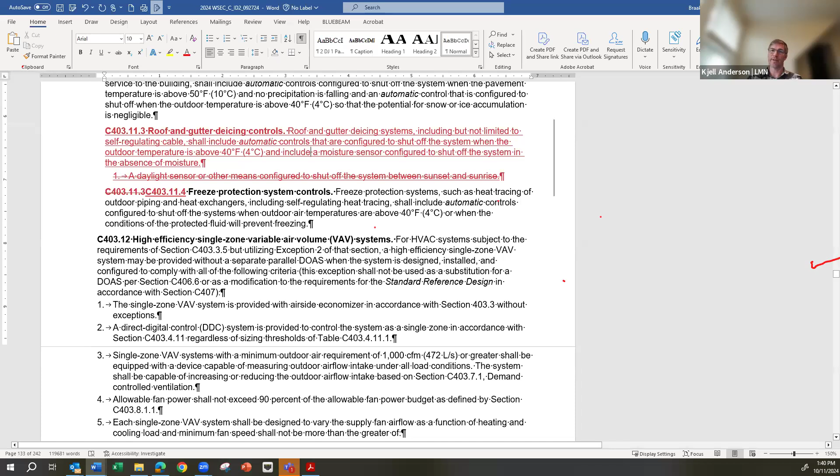Can we skip ahead to - what is it - Table C405 point something, 405.4, is that where we are? And Duane, do you want to launch into what you thought about this?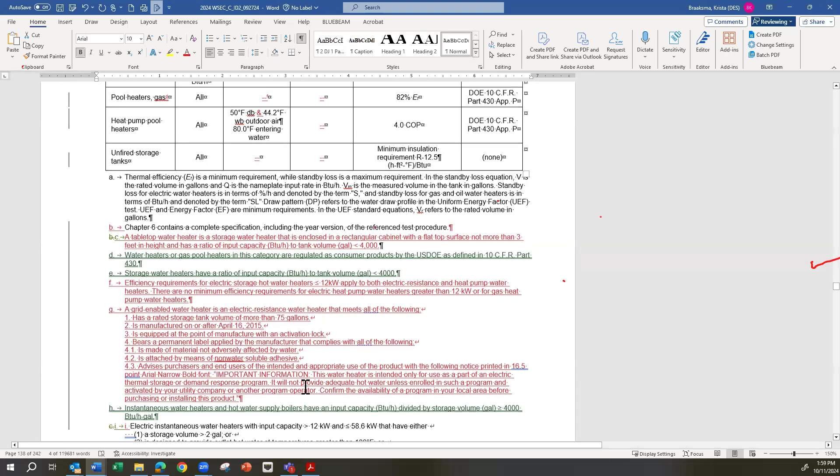That would make sense. I don't know why G would limit it, but then again, I haven't looked at the whole table. That's a good point. Well, that may be just what the standard limits it to. The testing standard is based on that specific model. That was my question, since it's so specific about a warning sign and everything else, I thought this was something that complied with a particular federal standard.

My reading of this, and I haven't researched any federal standards, but my reading is they're just saying if you're using the water heater in conjunction for demand response with the electric grid, then you have an exception. They gave you your exception, you don't have to comply with the standards. And I think it's inadvertent. They were saying electric resistance because they assumed, well, with electricity, with the grid, it's obviously electric storage. But what they missed is, what if you want to use a heat pump water heater for that fashion? Let's say your heat pump water heater didn't quite meet the other standards, but it's still going to be way better than electric resistive.

I see where you're going. I'll just make that a motion, and I'll second you. So I was going to motion to strip out 'resistance' just where it says 'resistance' after 'electric' everywhere. How about if it says 'electric resistance or heat pump water heater'? Would that work? Well, I would just say 'electric water heater,' because it's obviously with electric grid, so then you're covered with electric water heater.